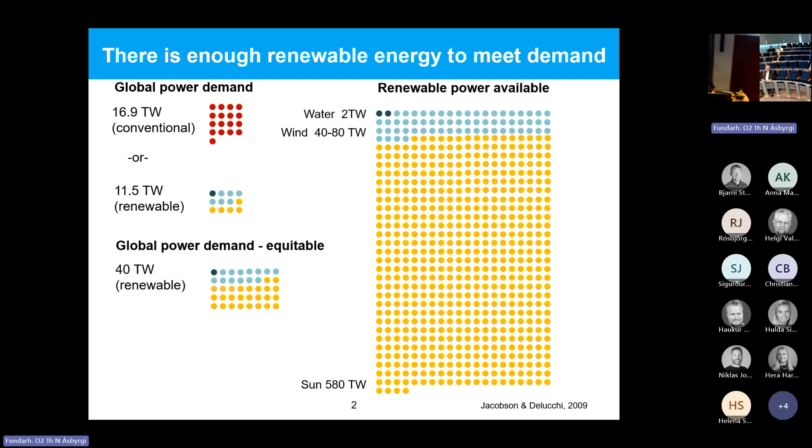Just enough energy to keep the traffic lights going and so that there's power at the hospital when you need surgery. If we look at it that way, we actually need about 40 terawatts. Okay, so much more than we even use today. And then we can compare that to what is available. So we have about 2 terawatts of water, another 40 to 80 of wind, 580 of sun. And you'll notice, I want to apologize on behalf of Jacobson and Delucchi for leaving out geothermal. I'm not sure why they did that.

But this is based on technology. So this is actually accessible energy, not just the energy that hits the Earth, but this is accessible energy using technology from 2009. So clearly the challenge isn't one of supply.

Really what it is, it's related to the intermittency and variability of most renewable energy sources. This intermittency creates this storage and transportation problem, right? As I think somebody mentioned, there's this mismatch between when and where energy is needed and when and where it's available. In Canada, most of our energy demand is in the winter for heating, and most of the renewable power we get is in the summer.

And so we have to start thinking about, okay, how do we capture and store that energy from the summer long enough to get us through the winter? And then in other regions, and Iceland may be one of them, there's a lot of energy here, but the only way we've been moving renewables around is through electrons, right? But building grids and connecting grids to where that energy needs to go isn't always feasible. So what we need is an energy carrier, something that liberates us from moving energy through the grid.

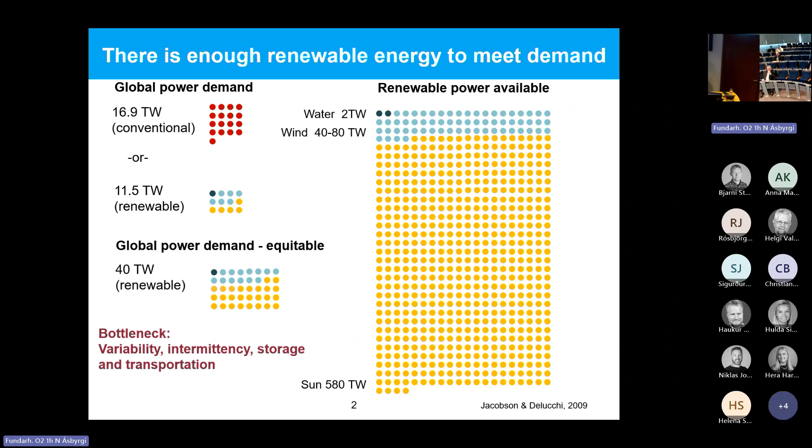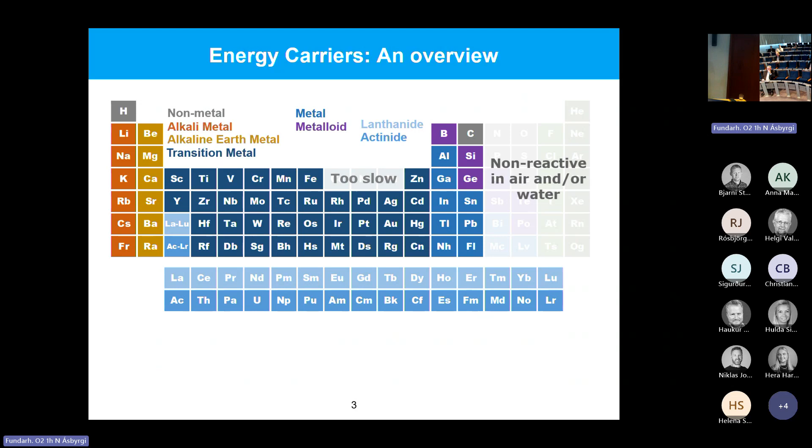So these energy vectors, again, if you've seen my TED talk, this is a little bit of a repeat, but I like to always just situate the audience. So this is every known element in the universe, and on Earth we typically get energy out of a substance through an oxidation reaction. So we need an element that reacts well with air or with water, and we have this transportation challenge, right? To make up for that geographical mismatch, we want things with high density. So anything with too high of a molecular weight will not be a suitable energy carrier.

On the first slide, you started to get a sense of the scale. And so we need something that is abundant. We want to avoid these rare elements because not only would there not be enough, but they'd also be extremely expensive. Safety. So nothing that's toxic or becomes toxic once it's oxidized.

And who here likes food? Okay. Well, I always take potassium off at this point because it's so important for agriculture. And so this is what's left. And it's not a surprise we see carbon up there. It's what forms the basis of our energy system now, and for good reason.

What fossil fuels give us is something that is high energy density and high specific energy. And we can use combustion reactions to get that energy out. So that means we also have high power densities. And that gives us convenient things like airplanes. But greenhouse gas emissions and reduced air quality are some of the major drawbacks.

And even if we weren't facing a climate challenge, fossil fuels are still a finite resource, and we can't just keep digging things out of the ground and burning them in this one direction. We need to start thinking about how to make our energy system reliant on something that's circular. So carbon is not it.

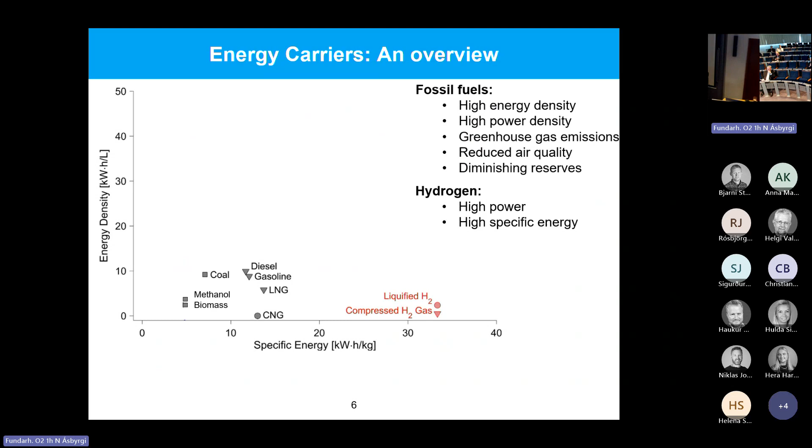But then it also has this extremely low energy density, which makes it very challenging to store and to transport. It's also a very small molecule, which also makes it hard to store and transport. Wide flammability range, 4 to 74%. So storing any great quantity of hydrogen is not something I want done near me. Anyway, so hydrogen itself may not be a great energy carrier.

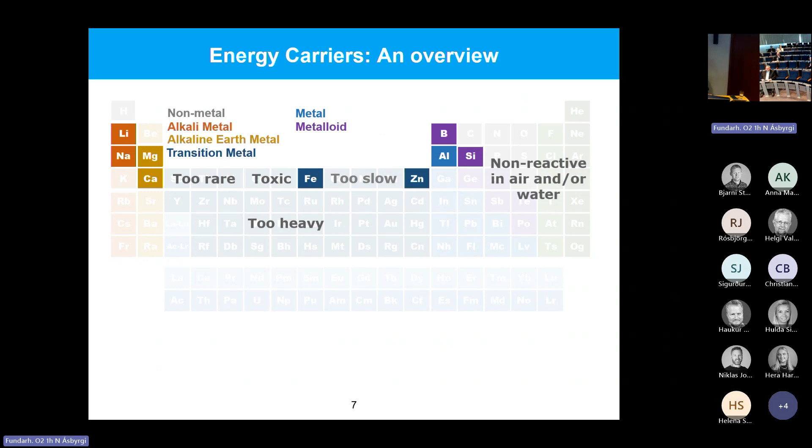And they have low energy densities because they have to carry the fuel and the oxidizer and a whole package to go with that. Definitely part of the energy solution, and batteries are very convenient for carrying a bit of energy with you, your phone, laptop, even cars. But when we're talking about long duration energy storage and moving storage around, batteries just can't quite do it.

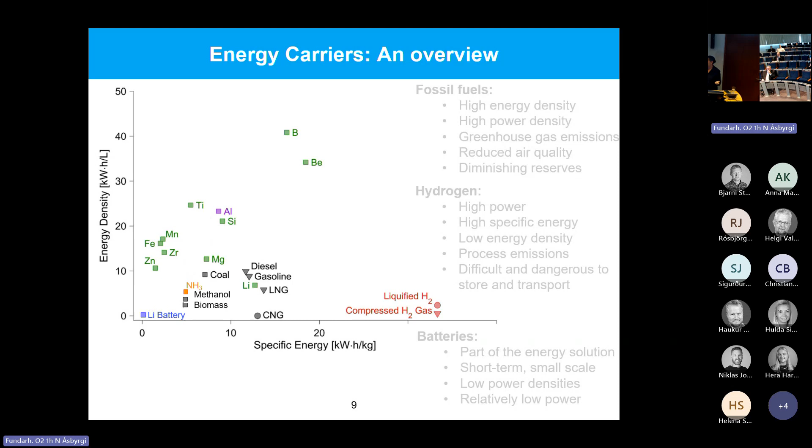Wait, do we say aluminum or aluminium? Aluminium. Aluminium, okay. I'll try and say aluminium. But it's written aluminum everywhere in this figure, or in this talk.

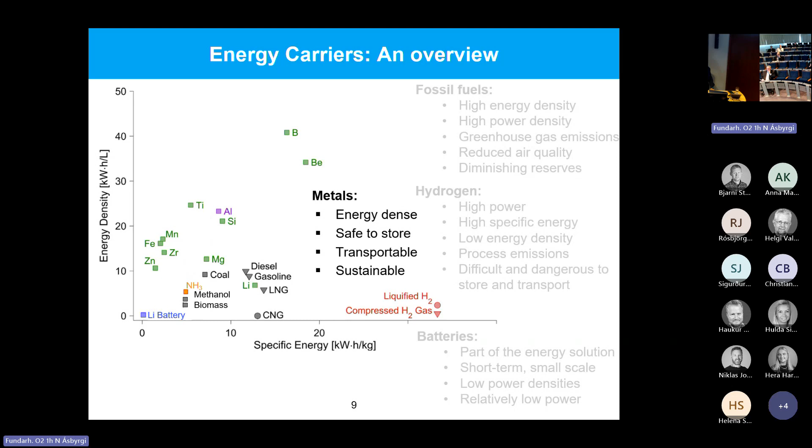So metals meet all of the criteria that we would want in an energy carrier. Energy density to store, very mature infrastructure. When it comes to common metals, we really know what we're doing. And metal fuels can be circular. So this is sort of how I like to envision a metal fuel system. So wherever it is that there's an abundance of clean energy, that's where the smelters are placed.

In Quebec, where I did my graduate work, there's an abundance of hydroelectricity. So much that Quebec has somehow become the 4th largest producer of aluminum in the world, despite having 0 bauxite reserves. And it's all due to that cheap power. So we're already kind of doing this. Once that metal is made, it's effectively storing that clean energy and can do so for a long period of time without leaking that energy or degrading that energy.

And then when the energy is needed, after either being shipped somewhere or months have passed and now the sun's not shining as much anymore and we need more energy, that's when the metal gets oxidized, fed to some kind of a prime mover. And then this is the key for the circle: to collect the oxides and then bring them back to wherever there's that abundance of clean power to recycle them.

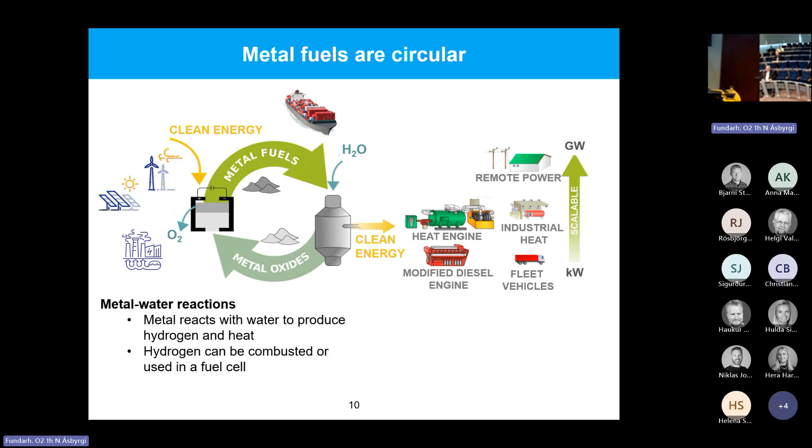In my research, I use water as the oxidizer rather than air. There's some really wonderful research going on in the direct combustion of metals. But in my research, I do these metal water reactions to produce heat and hydrogen.

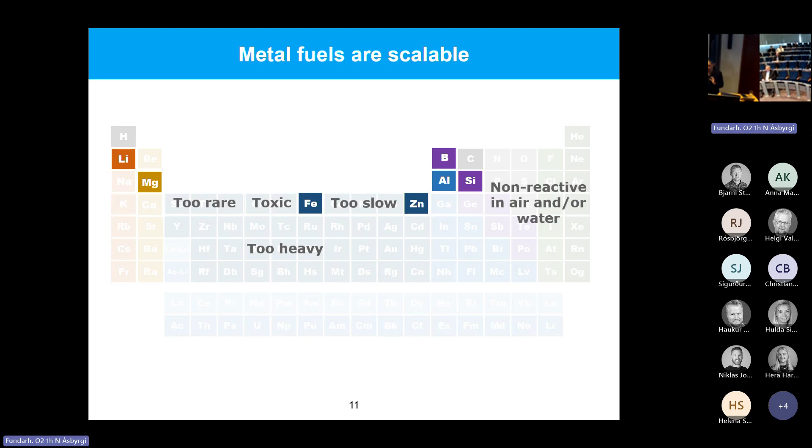Now, this last bit, I just wanted to touch on it very quickly, is the scalability of metal fuels so that we can narrow down the options a little bit more. If we do this very simple exercise where we say for some reason we needed to store 1 year's worth of energy in just one of these metals, this is how much of each metal we would need. And this is just a reflection of their specific energy. And then we can compare that to the known reserves of each of these metals.

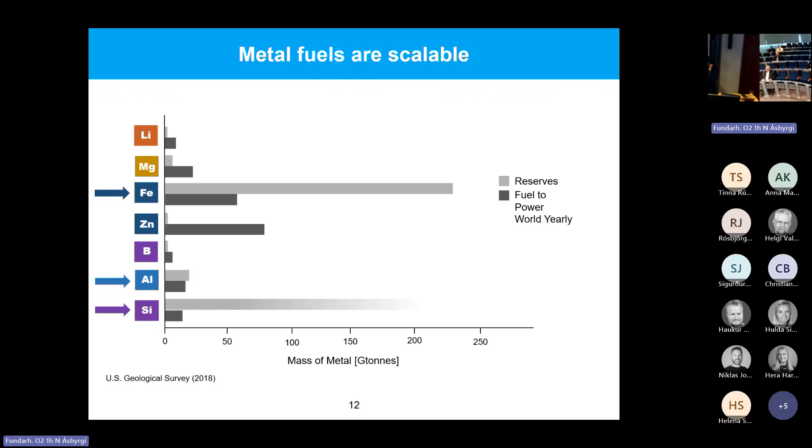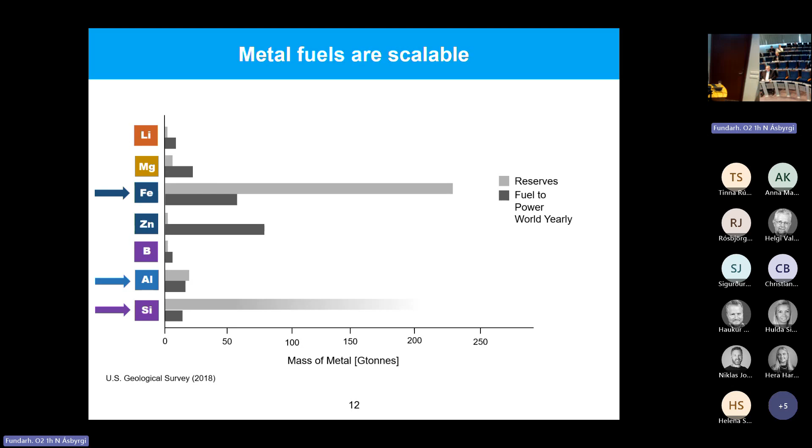And with this very simple exercise, we can see that there's 3 metals here that are really contenders for large scale energy storage, and that's iron, aluminum, and silicon. For metal water reactions of these 3 metals, aluminum is really the best one. It produces a lot of hydrogen, about 1,200 milliliters per gram of aluminum. It's abundant, it's light, it's energy dense, and the technology for producing aluminum is very mature.

The one thing that still does need to be addressed when it comes to aluminum is the use of the carbon anodes in the smelters. They degrade as part of the smelting process and produce CO2, and this is a process emission. However, there's a lot of really exciting research in the use of inert anodes. These don't degrade, they last a lot longer. And so with the advent of these inert anodes, this entire cycle using aluminum can be extremely low carbon or even 0 carbon.

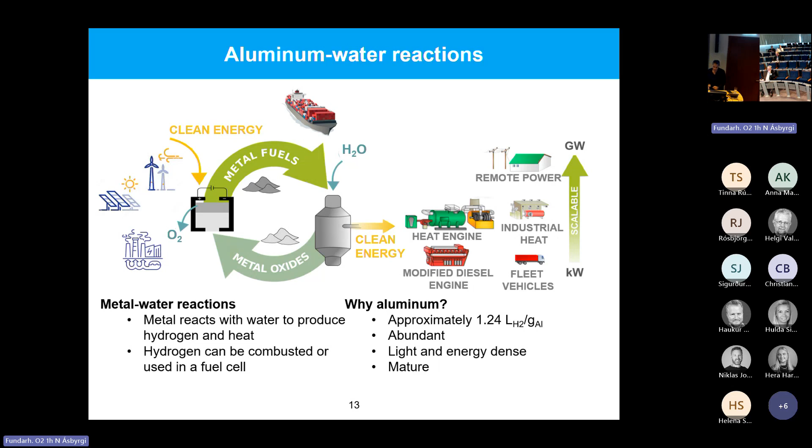And in the interest of transparency, I do want to address that there's different ways an aluminum water system could be deployed. The reaction produces heat and hydrogen. So the first scenario is one where both the heat and hydrogen are used and the water doesn't need to be taken into account, meaning the water is readily available. So it's either a stationary application near a big body of water or a marine application using both the heat and hydrogen, and this is where that system would lie in terms of its energy density and specific energy.

In another scenario where the heat is ejected, but just the hydrogen is used and again, water is available, the energy density falls where this 2 is here. The third scenario is one where water needs to be carried on board, but the heat and hydrogen are used. So think about maybe a train, some sort of long distance terrestrial transportation.

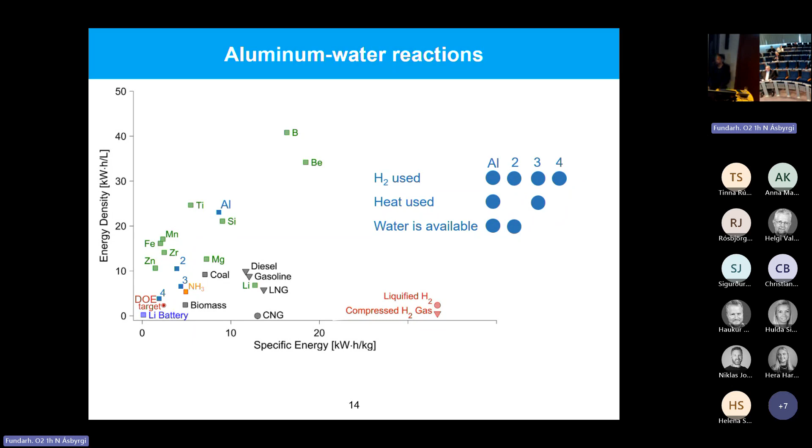So like a train or trucking. So it would fall where that 3 is, around ammonia. And then what I would consider the worst case scenario, where just the hydrogen is used, the heat is ejected, and there's no water available, then the energy density falls to where that 4 is. And I also mapped the US Department of Energy's target for hydrogen storage. And you can see that even with the worst case scenario, we're almost getting to that energy storage.

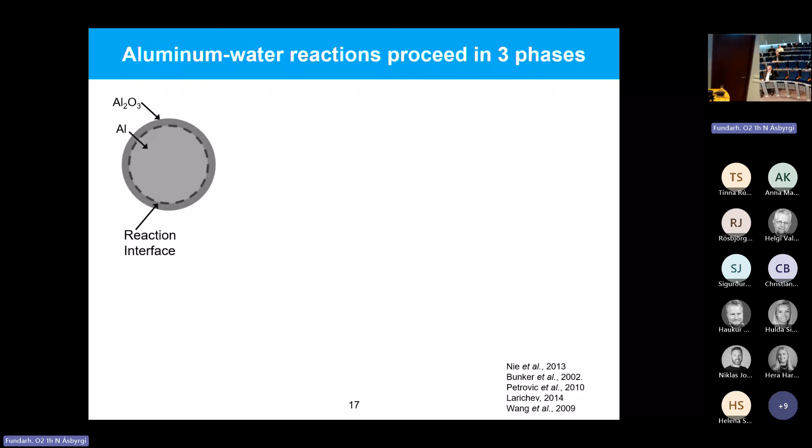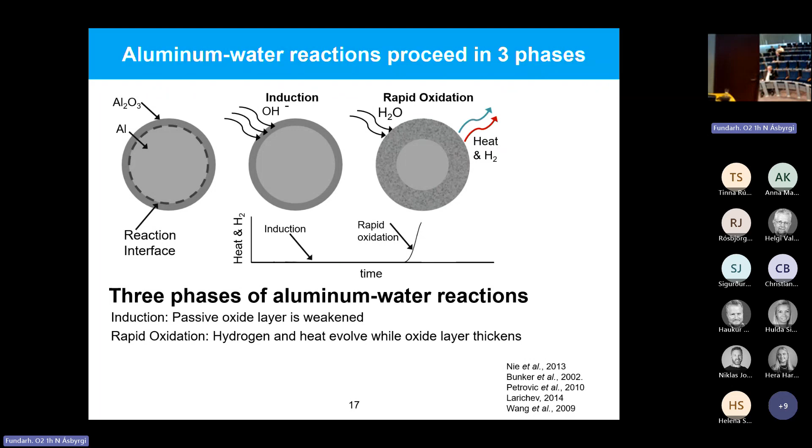And as a result, the reaction proceeds in 3 phases. The first one is what we call the induction phase. In this phase, that oxide layer is weakened through the migration of OH ions. Eventually, it weakens enough that water can get through. And then we have what we call rapid oxidation. So this is where the heat and hydrogen are actually released. And at the same time, of course, it's oxidizing. So there's an oxide forming, and it becomes thicker and thicker and denser. Eventually, the reaction will quench.

So it quenches for one of 2 reasons. One is all of the metal has been consumed, so the reaction stops, or the oxide layer or the newly formed hydroxide layer is too thick or dense for water to migrate to the metal, and so what's left is this core of unreacted fuel.

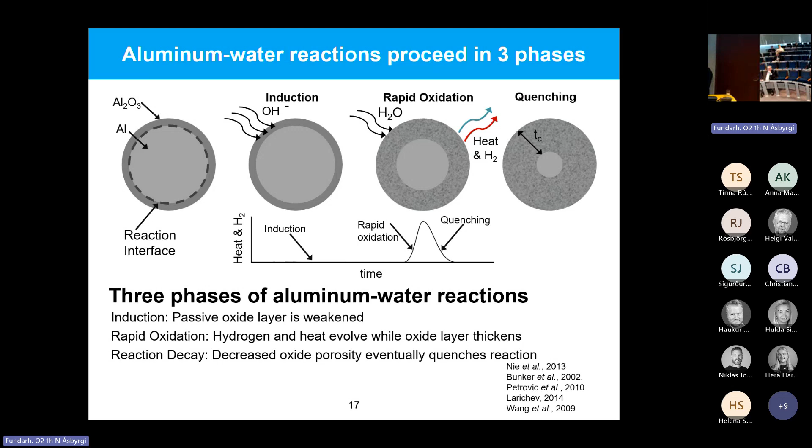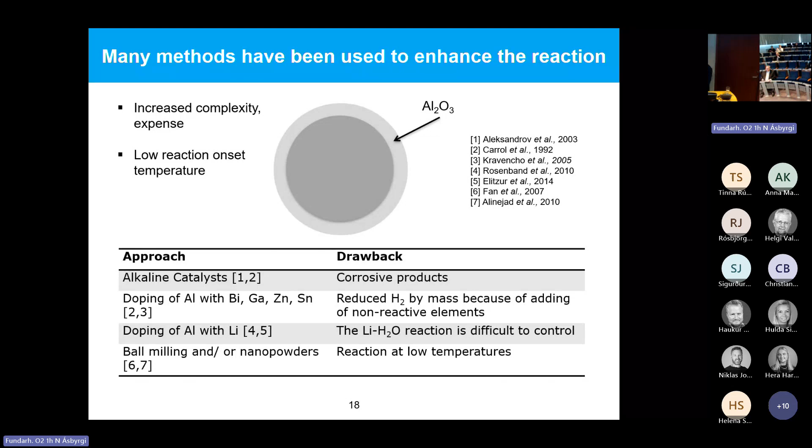Now, in these studies, that low reaction temperature is a feature. In my opinion, it's a bug, because it means that the reaction will happen at low temperatures. Not only is that a safety concern, but also half of the energy in an aluminum water reaction evolves as heat. So with a low temperature reaction, the heat that evolves is low quality heat, which is hard to use. And so half of the energy of the fuel is going to be wasted with the low temperature reaction. So obviously in my research, I go the complete opposite way.

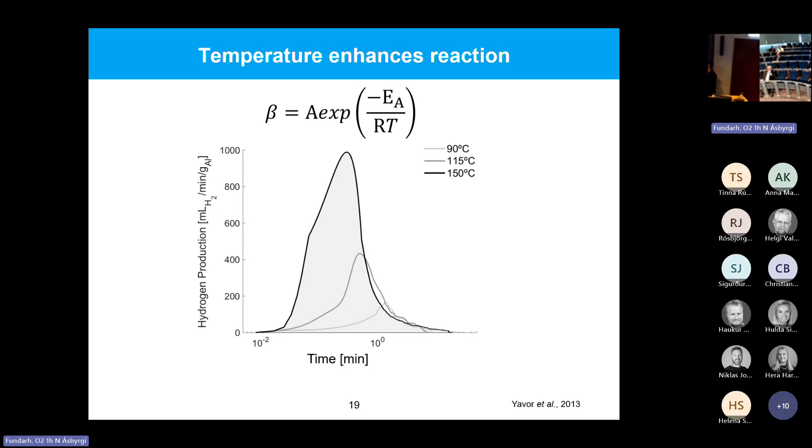These are experiments that were done by a predecessor of mine at McGill. Just looking at the Arrhenius expression at the top, we know that reaction rate increases exponentially with temperature. And this holds true for aluminum water reactions. You can see that with a pretty modest increase in temperature, there's more than a doubling in peak reaction rate. If you integrate these curves, that tells you the hydrogen yield. And so going up in temperature increases not only the reaction rate, but also the efficiency, or the hydrogen yield, in each case.

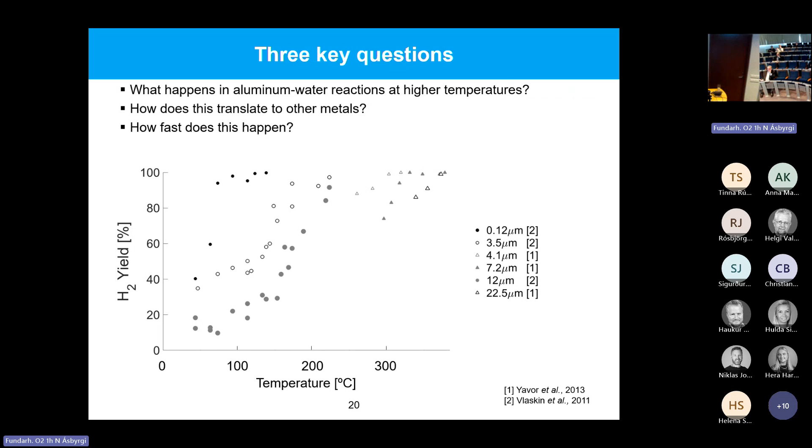So when I started my research, I really had 3 big questions. What happens if we go to even higher temperatures? How does this translate to other metals? And then how fast is all of this happening?

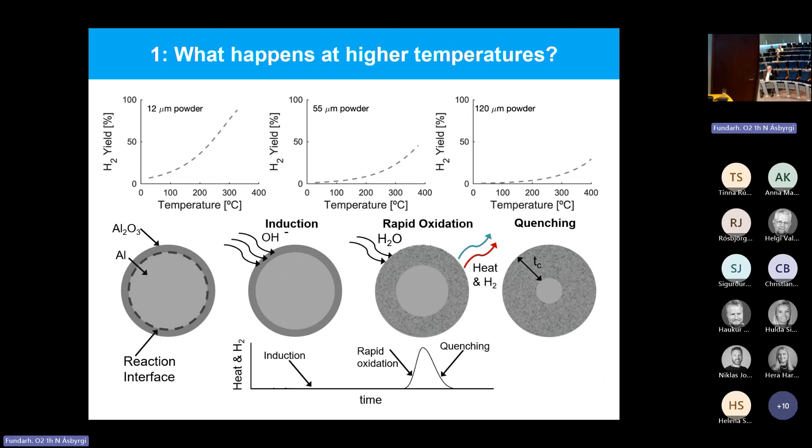So what happens at higher temperatures? Now, there was a lot of data for low temperature reactions. So just using that data, I extrapolated these curves based on the size of the powder: 12, 55, and 120 micron powder. These dashed lines indicated or sort of predicted what we thought we would see. And so you could see that with 12 micron powder, you would get the full hydrogen yield, but by the time you get to 120, it would be less than half. And this was based on what was out there in the theory at the time.

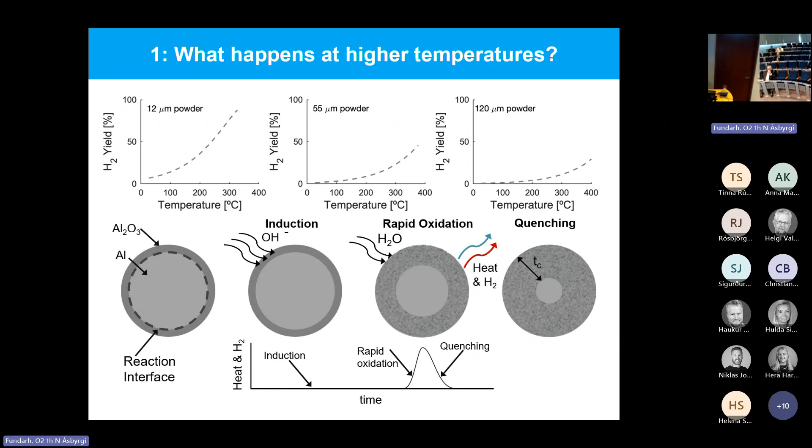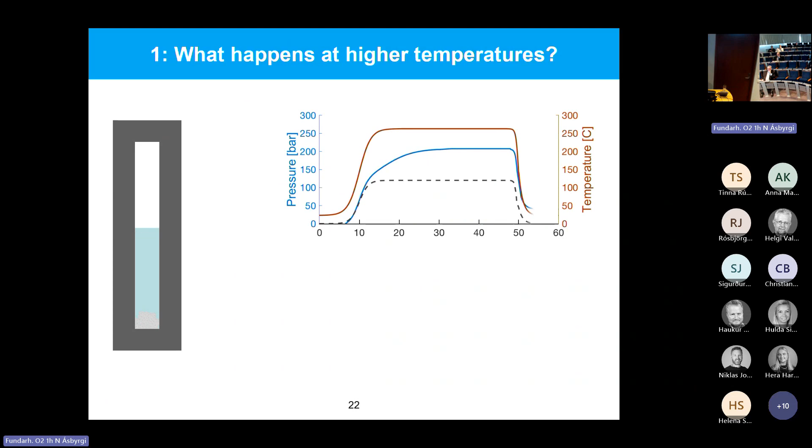So I did some experiments, very, very simple. Metal and water were loaded into a reactor, and it was sealed up. And then it would be heated to the temperature that we were interested in, held for a certain amount of time, and then cooled back down to room temperature. And the yield was calculated just comparing the initial and final pressure. So very simple, very straightforward. This is what the curves actually look like. And that's the actual apparatus there. It's not much to look at, I know, but what's happening inside is what we're interested in.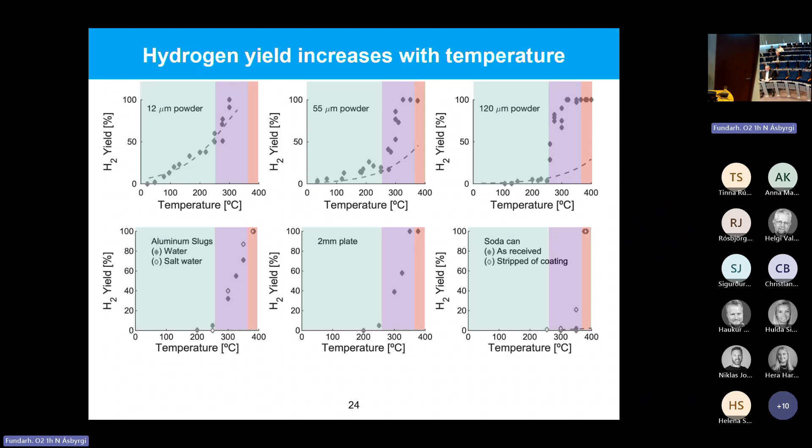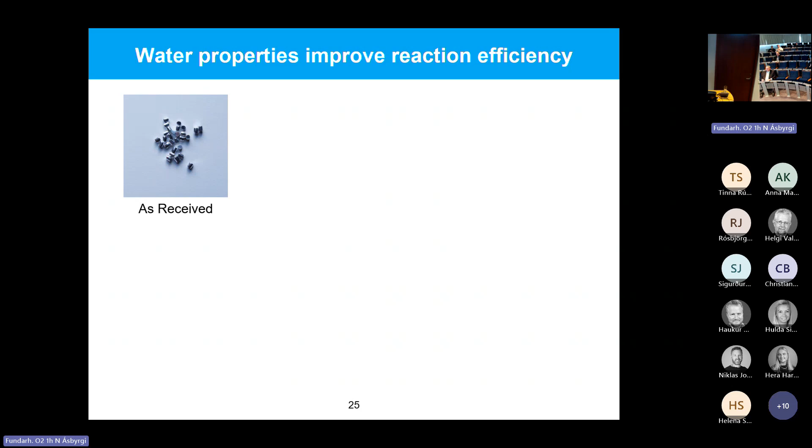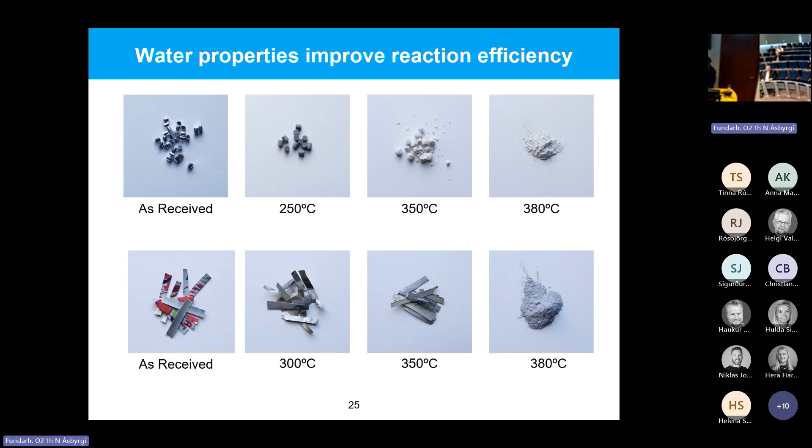The first one I'll talk about is what happens at around 250 degrees: the ionic product of water peaks. So water can act as both a base and an acid. And all that means is that it can either give up or accept a hydrogen. And the ionic product is just the product of the concentrations of H ions and OH ions in the fluid. And so as temperature increases, these forward reactions are favored, which means that the fluid becomes furnished with OH ions.

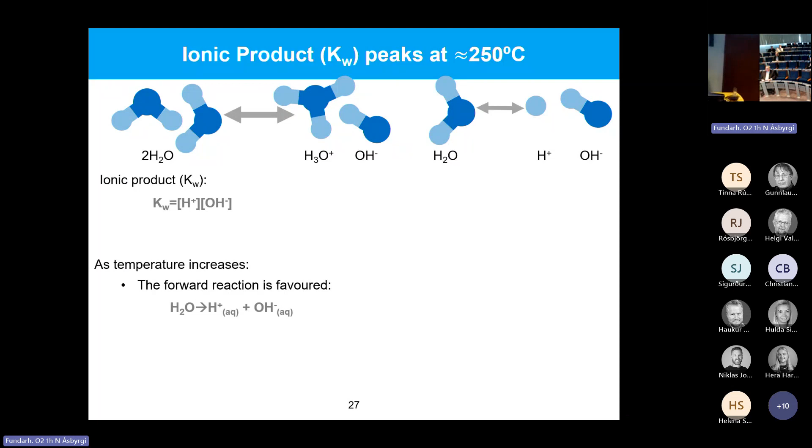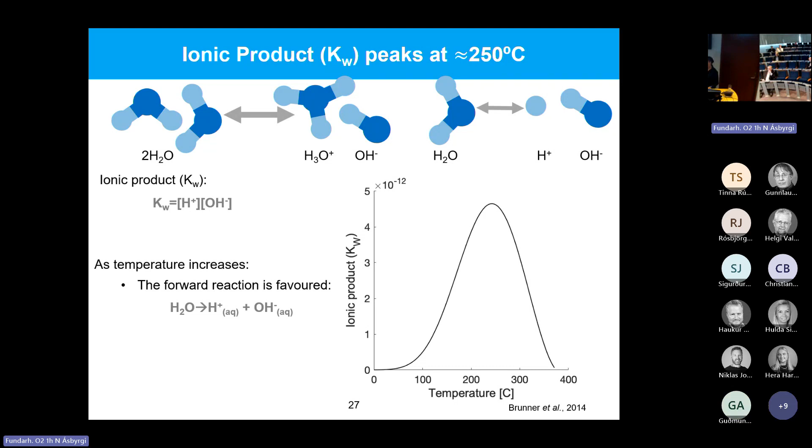What I didn't mention in these low temperature experiments where they were trying to catalyze the reaction, one of the most common ways of catalyzing the reaction is the addition of a base like sodium hydroxide or potassium hydroxide. So by adding that base, there's more OH ions, and that's what attacks the passivation layer. But by going up in temperature and pressure alone, we get that. I don't want to say catalytic effect because it's not a catalyst. It's really just the change in the water properties themselves. So you can see here that it peaks, and it's this change in water property that really enhances the reaction and why we get much higher yields in that transition zone.

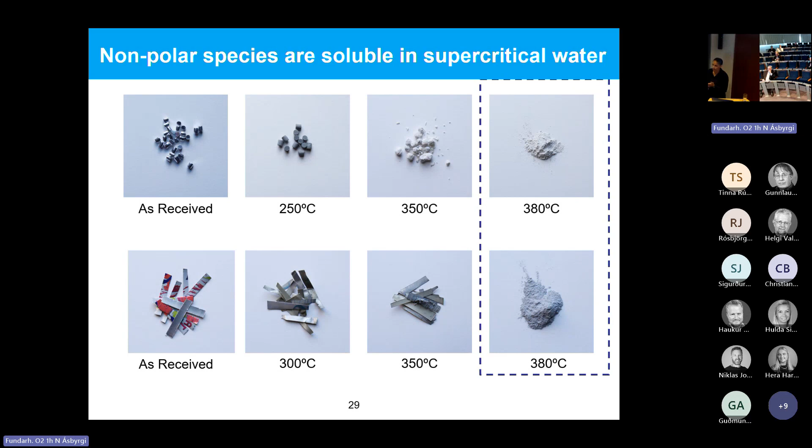And then this was also quite remarkable, going from something that really resembles metal to a powder. And this is due to the change in polarity of supercritical water. So relative permittivity is what governs solubility, and under normal conditions, water's quite polar and dissolves polar species like salt. But at the critical point, it drops to sort of 1 to 10, and that range is just a function of pressure. And so it becomes almost completely nonpolar, which means that it can start to dissolve nonpolar species. And the nonpolar species that we're really interested in dissolving here would be the hydroxide that forms in the reaction.

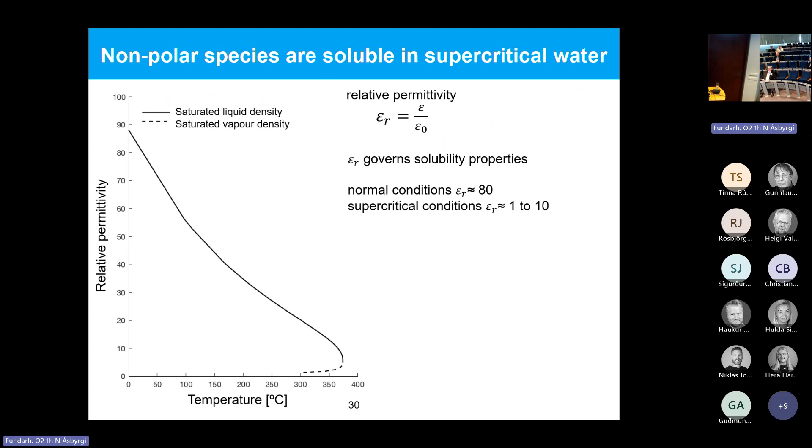And so my hypothesis is that the formed hydroxides are either dissolving or they're just not cohesive enough to passivate the metal. So the metal is continuously exposed to the oxidizer until it's completely consumed. And the form of the oxides kind of supports this hypothesis. So that's the first question. Going up in temperature helps the reaction. Great. How does this translate to other metals?

For these experiments, I did take out most of the group 1 and group 2 metals because we know how reactive they are with water, which is very. And so just in the interest of safety, we didn't do experiments with them. I also removed boron and iron because, I can go into detail of why, but they're not expected to be very reactive with water. And then I brought back titanium and zirconium because there were some low temperature experiments that were done that showed that these were promising in terms of their reactivity with water.

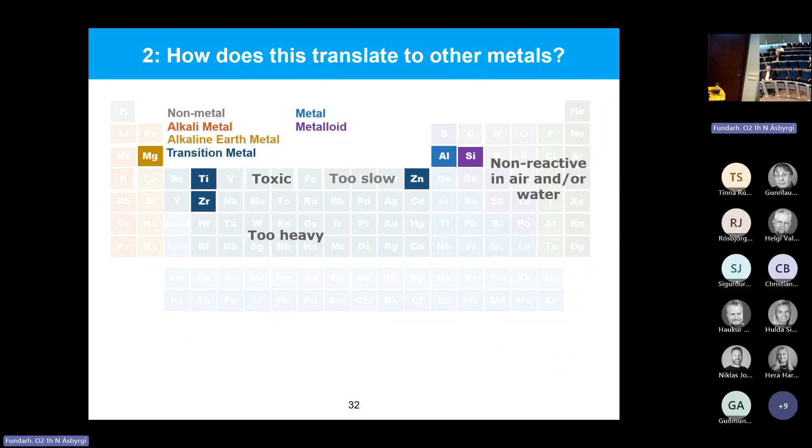And this is what I found. So this is what was expected in every case, just based on a simple calculation. And this is what was found. So you can see that with the aluminum, its alloys, magnesium, and zinc, under supercritical conditions, we get full yield, or in almost all the cases, but very, very good even with the aluminum 6061. Whereas the silicon and zirconium, I would say underperformed, but what this is just telling us is that these are potentially great materials for designing or for using in the system.

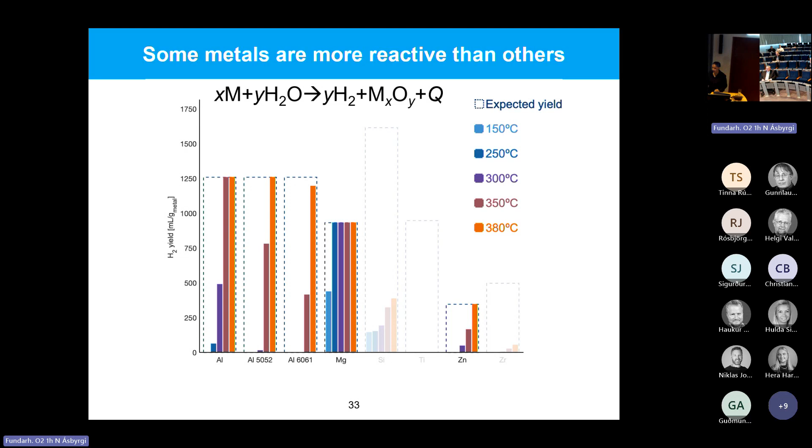And titanium as well, there was zero hydrogen produced. There were changes to the metal, like you could see them. You could see them also under SEM, but there was no hydrogen produced. And then finally, how fast does this reaction occur? So what I was really interested in is this region of the vapor dome. That star is the critical point, and so this is the isotherm that I was following. And so I was interested in the role of the water density.

And so for these experiments, I built a new apparatus. It had a top and a bottom reactor separated by a valve. And in the experiments, everything was loaded and then heated up to the temperature. When we were at the temperature, the valve was opened. They mixed, produced hydrogen, and then everything would be cooled back down. So like I said, I used 3 densities of water, what I'll call the high density supercritical water, the low density supercritical water, and then the vapor density water.

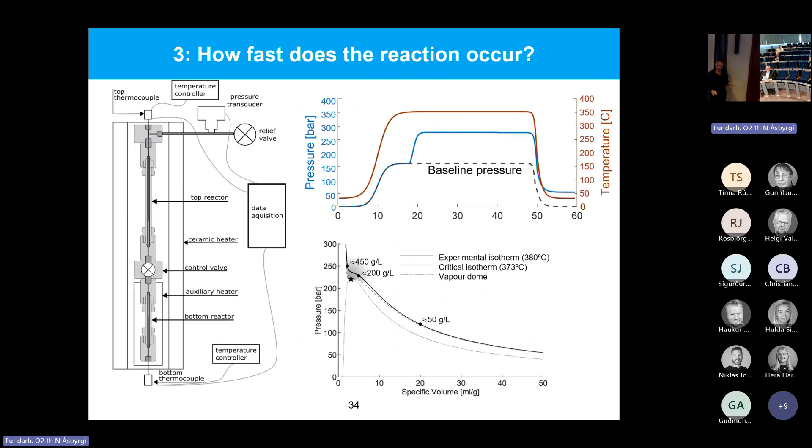And then with the rates, it was a different story. So here, there's a big difference between the high density and low density supercritical water, but not much of a difference between the low density and the vapor density water. And this held for all of the samples. So those are the results for the 10 micron powder, but you can see all of them. So there's a big difference between this and this, but not so much between this and this. This was a little bit counterintuitive.

It wasn't what I was expecting to see, because the low density supercritical water has the properties that seem to be desirable for oxidation, right? Low viscosity, high diffusion rate, high relative permittivity. These are all the things that indicate it would be a good oxidizer. But we saw the opposite. And so what that tells us is that there's some relationship between the reaction rate and density or pressure. And so, if we're writing an Arrhenius expression for this reaction, we would need to somehow capture the concentration of OH ions, is my current thinking.

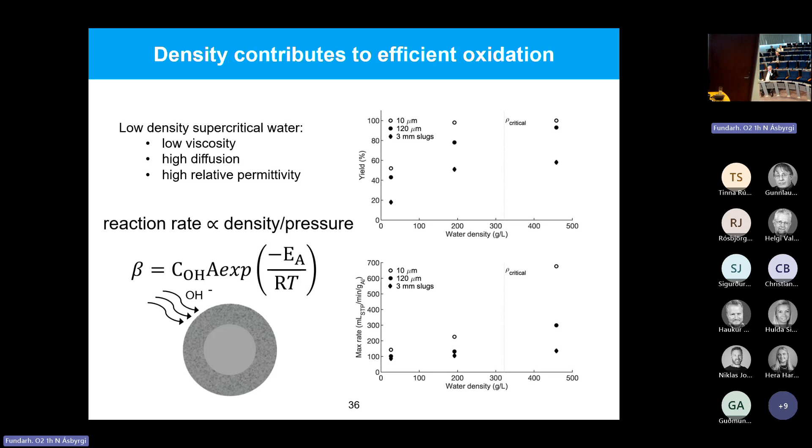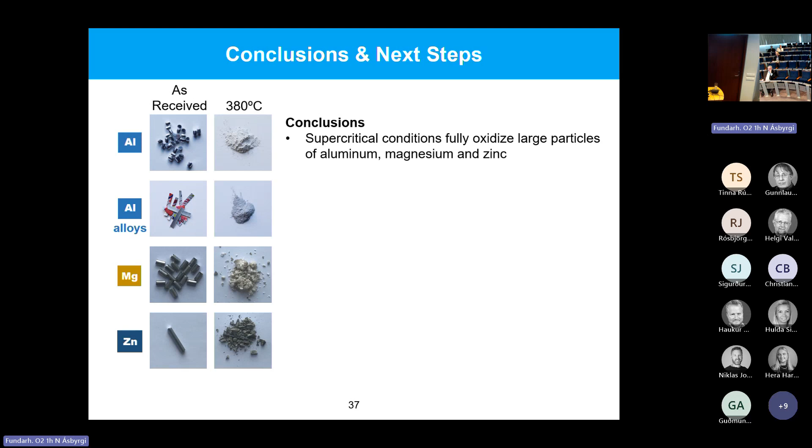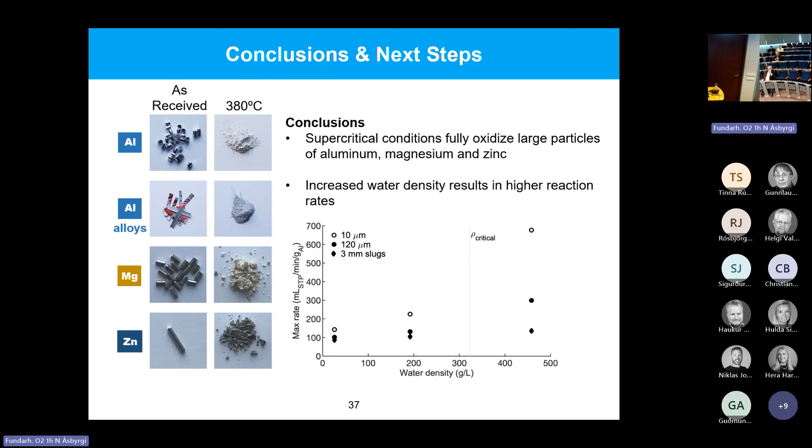So, we've identified 3 metals that are promising as metal fuels. And we've also determined that increased water density or pressure is conducive to higher reaction rates. And so what comes next is what I want to share with you. One of the things I'm really interested in is the effect of water quality. All of the experiments I've shown today were done with very, very pure water. We use reverse osmosis water, but in the real world, that's not what we'll use. So I'm interested in, if there's salt for marine applications, or if there's organic material in the water, how does that affect the quality of the hydrogen that's produced? And does it poison the reaction, enhance the reaction? These are all open questions.

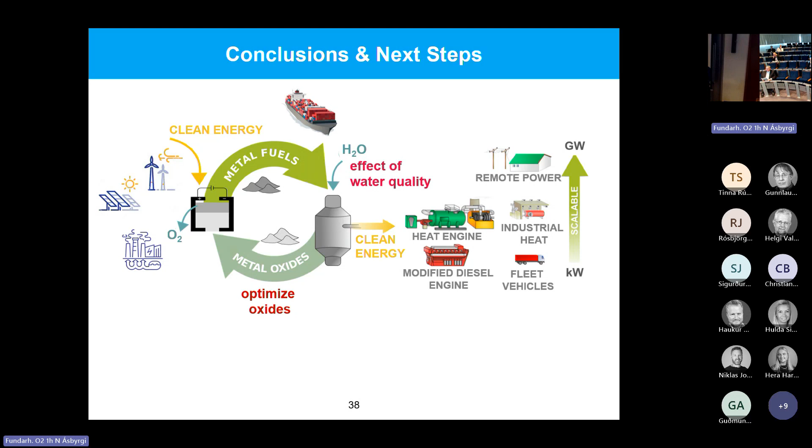I'm also really interested in how we can optimize the oxides for recycling. We know that based on the conditions inside the reactor, we can tune certain things about the solid product that is produced. So we can make the particles larger, smaller, we can do some things with the grain sizes. So that's something that's really interesting that I'd like to start to work on. And then finally, okay, great, we can produce heat and hydrogen. Now, how do we start to use it? And so that's another area of research that I'm looking to branch into.

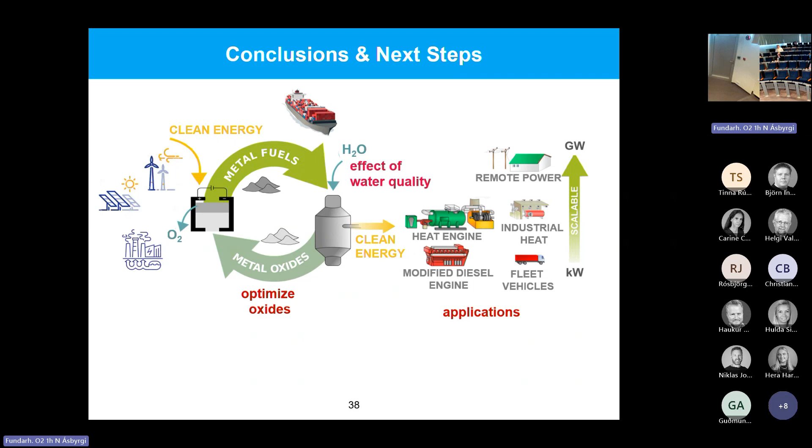Thank you. So while she gets the talk up, I will just start by saying that there are two projects in this field that Kina gave us a presentation on where Icelanders are participating. I will briefly, in my 10 minutes, introduce one of the projects, and then Ruan will introduce the other one. But first I would just say, as somebody who has been working a little bit in this area, in my opinion this is as expert a presentation in this area as we could have gotten.

Having worked now on our project for 3 years, I came to the same conclusion. You will see that the project I will be talking about is working on the lower temperature end, but I also came to the conclusion that if we want to use this for energy storage, we have to do all the things that Kina's been talking about. Go to a high temperature, especially if you want to harvest the maximum heat, etc. So that's my brief introduction on that.

And then I just want to introduce myself, because it's my first time here at Verkís. I've been in Iceland since 2016, in part so that we could have a complete BS degree in chemical engineering. Before that, we in Iceland didn't have a complete BS program, which is why that was important in 2016. And the main thing that I keep myself busy with since 2019 is exploring the possibility we have in Iceland to produce e-fuels: hydrogen, methanol, where we are a world leader in some way, ammonia, methane.

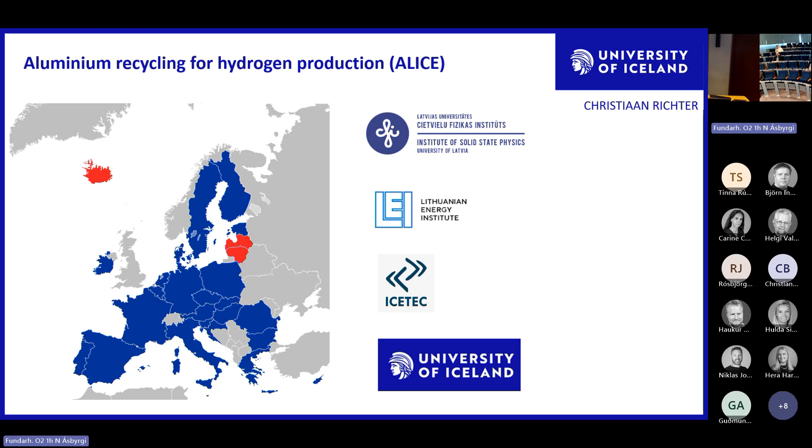And so the project, the name is there. I didn't come up with it, so I'm glad for everyone to answer the question about how to pronounce it. But of course, here's the partners in our project. It's a Lithuanian, Latvian, Icelandic collaboration. There are the Baltic institutions, and then you'll see Tæknisetur or ICETEC, which used to be the Innovation Center, is involved in both projects. And in this particular project, we at the University of Iceland are also a partner. And this has been very well presented in Kina's presentation.

But the basic idea is that you can have aluminum reacting with water quite vigorously if you get past the passivation layer. And you can do that with some of these tricks that she presented on, or by just going up in temperature. And I think if you're going to do a big commercial installation, maybe going up in temperature is the simplest. The most common approach, if you look at the literature, is also the one that's being used in the project that we have partnered with.

So this is the project with the Lithuanians and Latvians. We are doing the most common approach, which she has briefly mentioned, where you throw in a strong base, sodium hydroxide or potassium hydroxide, to get the reaction going. And then the temperature can be as low as 20 Celsius. It typically heats itself up to 80 Celsius if you don't cool it.

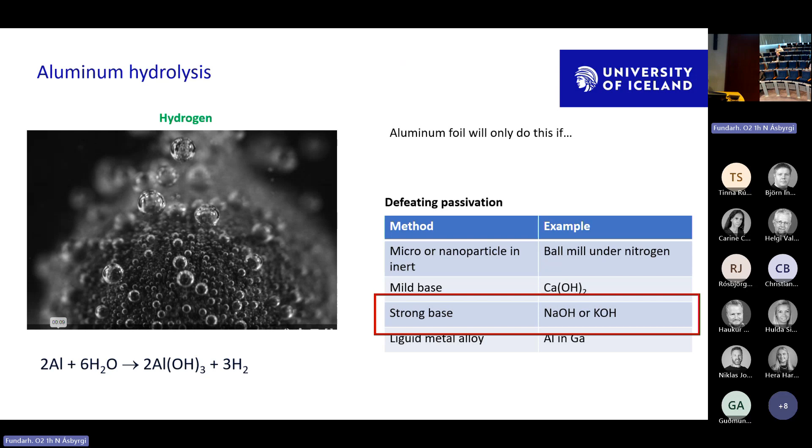Okay, and then in our particular project, the one we're doing with the Lithuanians and Latvians, we are basically just focusing on waste aluminum, so scrap. And it turns out, if you research it a little bit, we are doing pretty well with cans. So as long as people deposit the can, you can remelt the can, and it's probably the best thing you should do with it. So this is probably not the best material to react, because it's just better to remelt it.

And then we have been looking into dross a little bit. We even got samples from Alcoa and Fjarðaál to look into it. But the main opportunity that we have seen so far is in some of the scrap metal.

If you really look deeply, I'll give you the short answer. If you can remelt it, it's the best thing, just to remelt it. But sometimes there is not a match for the alloy.

And then rather than, oops, should I just hang up? Or you can hang up from there.

Yes, so this is primarily the background of this project. Take scrap metals that you cannot just remelt, and then see if you can extract value out of it by harvesting some hydrogen and producing aluminum hydroxide first, which you can calcine, and then you have basically alumina that you can return to the smelters. So it's basically a recycling option. Okay.

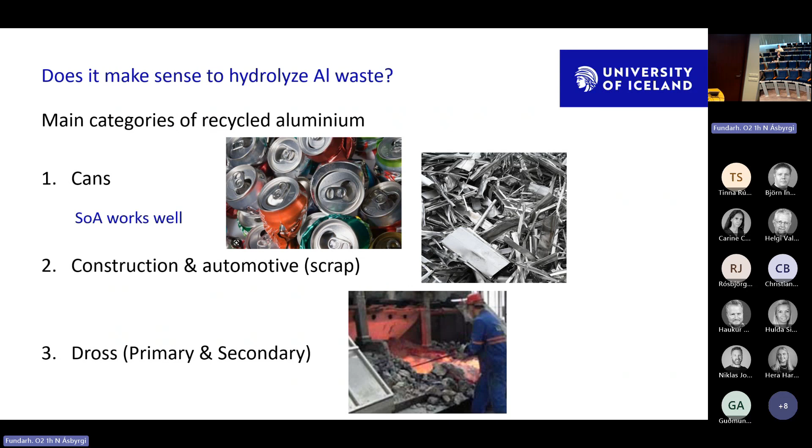So yeah, these things are basically saying where the opportunities are in recycling. So it's basically what Kina talked about, but now the focus is on optimal recycling, getting maximum value out from a waste that you cannot remelt.

So in our project, there's many aspects. Our Lithuanian, Latvian counterparts have got a lot of equipment, and they also play with plasmas and nuclear physics, the sort of old Soviet remnants. So they're not afraid to do experiments in all kinds of conditions. So both of these institutes independently are making reactor prototypes. So this is their role. So if you want to see a prototype reactor, you can go visit them.

Then they also helped a little bit with modeling the reactions. And then we published 2 papers, and I'm going to talk about this one. That's why I've circled it, just because it appeared today. So it's like a fresh result.

I don't know, you Icelanders, we of course love fresh baking goods and bread and whatever. It comes fresh from the oven.

So the only reason I'm really going to pick this one result to share among the many is just because it's fresh. It came out today. The relevant article, you could see it today for the first time. Okay. And then finally, ICETEC is very much involved in characterizing, for example, the dross from the smelters, seeing what's in there, and then also the solid products.

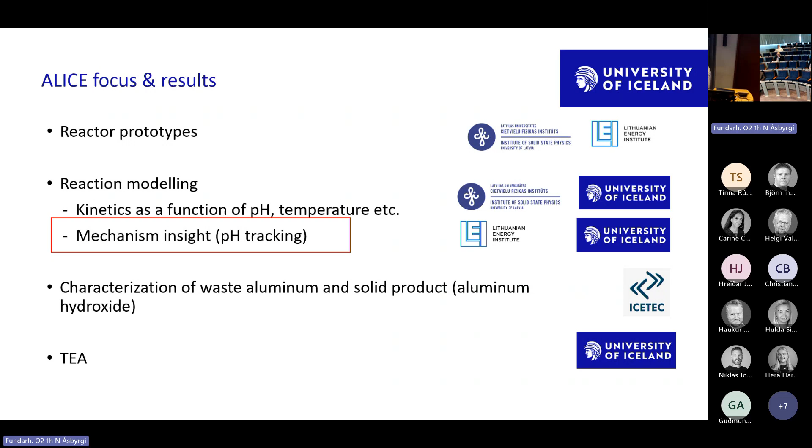And then our final job in the project is to do techno-economic analysis. Okay, and now I'm going to jump to this fresh result and I'll give you the main overview. And I know it's a bit messy slides because it's the first time I've been sharing it with anybody, the article just came out. But essentially what is on the board here is just the main idea of the project.

But to understand the little result I will share now, here is the simplest understanding of the chemistry, certainly at the lower temperature, because the product slightly changes when you go up in temperature, as you heard earlier. But what is the chemistry that's happening? So the first chemistry that is happening is that the aluminum can dissolve. And again, this might change in high temperatures.

But if you have a very basic solution like what we do, pH 14 or 13, then the aluminum metal can completely dissolve. In fact, our Swiss colleagues have done beautiful experiments where you throw in the powder, and if you don't have too much powder so it's saturated, it's all gone. The aluminum dissolves at low temperature with a high basic pH; this is the first step.

The aluminum dissolves. Then there's another step: when the aluminum atom leaves as an ion, it leaves behind electrons in the solid aluminum particle. And that then can evolve the hydrogen, basically split water. And I admit what I'm telling you is one idea of what happens. What I'm going to show you now is that in this result we've just published, we're checking how much the data corresponds to this model.

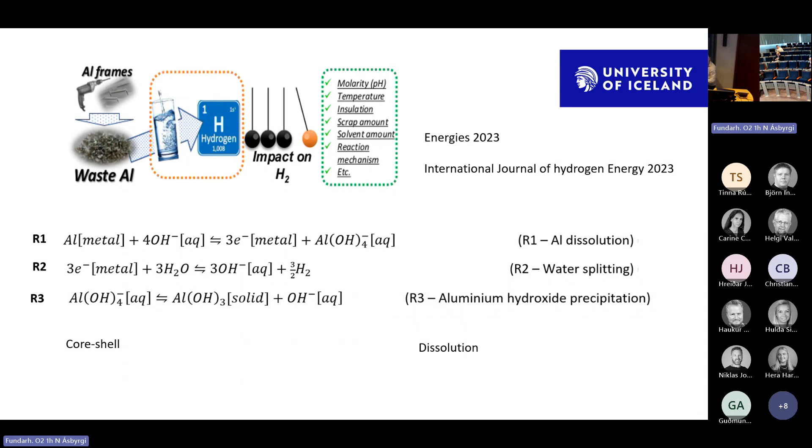And I think as the temperature goes up, the mechanism might slightly change, or the path of how the hydrogen comes out in the aluminum reaction. And then finally, these aluminum ions, if there's enough of them, deposit and make new aluminum hydroxide particles. So this is the most commonly cited, most commonly believed chemistry in the literature for the low temperature version: how do we get hydrogen, how do we turn aluminum metal into aluminum hydroxide? These are the 3 steps. And then the key thing I will just show over here.

So there you see something more similar to what might be happening at a high temperature, that we have a core shell reaction, where actually the aluminum doesn't dissolve, the reaction just eats up the particle towards the middle, and then the unreacted part in the middle may stay unreacted, and you don't have maximum yield. The nice thing is, you have to use a high base concentration at a low temperature, but we get almost always 100% yield. And it's not a surprise if we do it so that all the aluminum dissolves.

Okay, so now we'll get to the point so that you can understand just the result, and that's all I will do today. And that is, if you look at each of these steps, the first time I did it, I thought these are just cartoons to show the steps, but I don't want to spend too much time just describing the pictures for these steps. This is what I want to show.

So the very first step, if you carefully look at the reaction, you will see that it consumes 4 hydroxyl ions. So if the first step alone were to happen, and the other 2 steps did not yet happen, what you will see is your OH minus, your hydroxyl ions, will get less. And that corresponds, if you think back to high school, or if you work with electrochemistry a lot, if you reduce your OH minus ions, your pH goes down.

So this is the main thing that we have published now. We realized if we look at the pH in the reactor, we should be able to see if, for example, this happens first, and then this, or does it all happen simultaneously? For example, there should be a pH change as this step happens. And then if you look at the next step, you can see now where the game is.

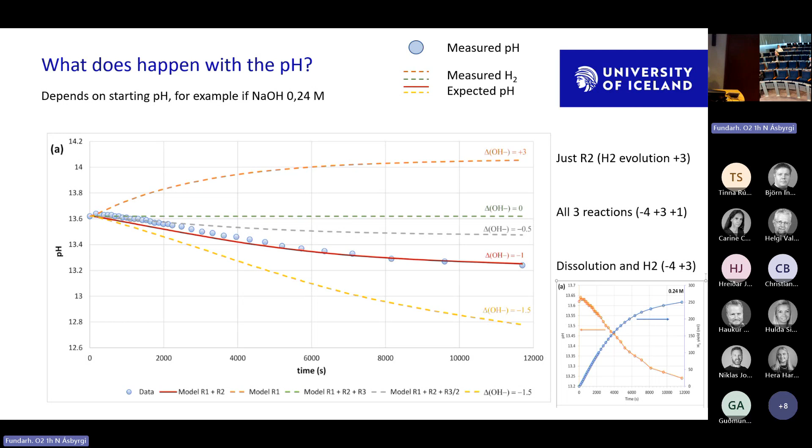That's what fits the data at this moderate basic pH. And then of course, if you let this go long enough, the aluminum hydroxide starts precipitating and the pH completely goes flat. So at these not terribly basic conditions, it seems to fit the basic model well.

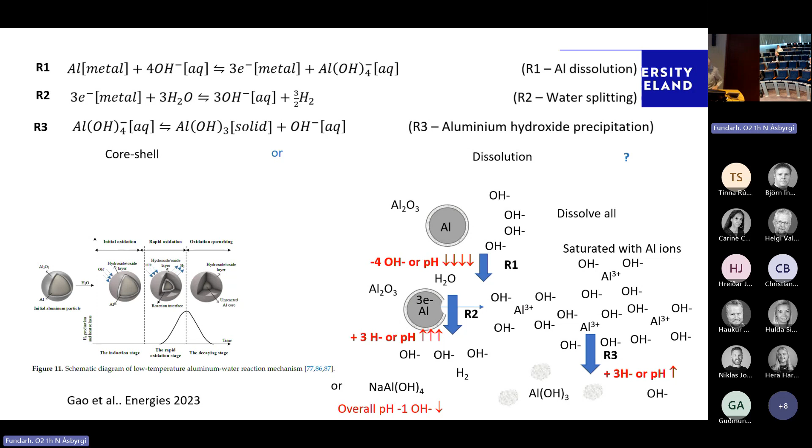So this is all I'm going to share. Just the basic take-home idea, which we can take right up here in Iceland, is this idea of measuring the pH to see what's going on. We and the Lithuanians and Latvians came up with it. Maybe some other people have done it. Have you done it? No. So of course, other people may have done it, but we couldn't find it in the literature. So I thought it's something to share, also because it's a fresh result, and it relates a little bit to how things are going.

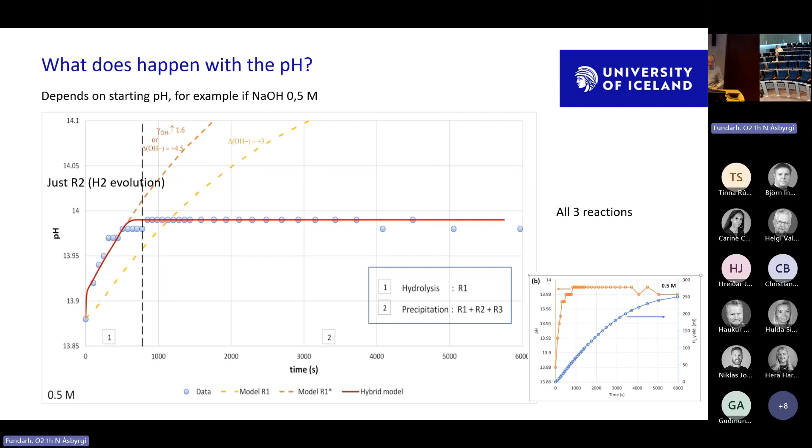That is it for me. Okay, yeah. So right there. This is sort of the conclusions, what I just shared. That's it.

Some question for Christian? You can ask some of the previous questions again. They were also good. And we also have a take on all of them.

I'll take the one about the intermittent aluminum smelters, because that's something we in the e-fuel community are also very involved in. When it comes to producing e-fuel, electrolysis is, in principle, very flexible. In the last 6 months, one of the e-fuel projects, Carbon Iceland, has been meeting with all 3 of the smelters, because we can really have an alliance. Firstly, the smelters have the CO2, because of these anodes that are burning, so that we can package our hydrogen into methanol. And secondly, we're actually partners when it comes to energy. Both the smelters and e-fuel will do better in Iceland if we are not so starved for energy.

In Iceland, we have not had a new dam for 10 years. And my home country, South Africa, did the same thing, and now there are rolling blackouts. So generally speaking, as the country grows, we need more energy. So that's one way we could do it. The e-fuel project and smelters can work next to each other, and the projects can be designed from the ground up. That's really why we're reaching out to EFLA and Verkís, and we would have many subcontracts if these things were to be realized, to be flexible, and then we would actually be a partner with the smelters and help them levelize out.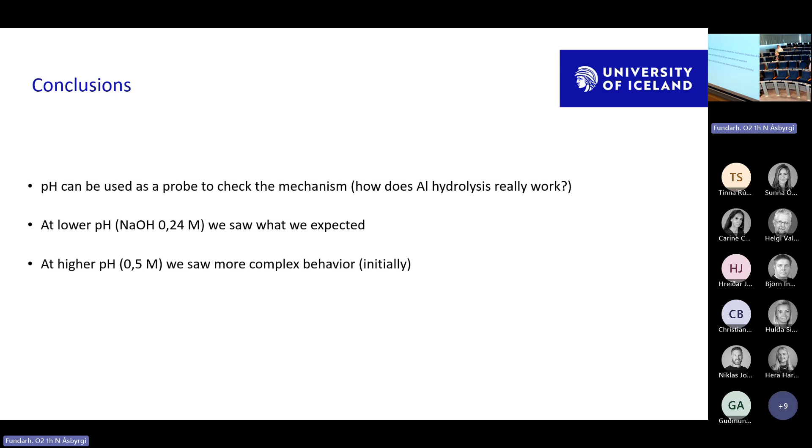Okay, the last on the floor is Alan Merbekova. Dr. Alan has over 12 years of experience in academia and industry working with metal production. Currently, she works as a senior research scientist at Tæknisetur or IceTec on various green technologies, where they develop CO2-free metal production. She will talk about the Reveal project, a new technical solution for storing large amounts of energy at low cost for producing heat and electricity using aluminum as a renewable fuel.

The floor is yours, please. Yeah, thank you. It's actually a great honor speaking here. Verkís has been my first workplace, and I had very good impressions, and my colleagues were very friendly and nice, which helped me to come to Iceland.

So I'm presenting this Reveal project. This project is co-funded by the European Union Horizon program and the Swiss State Secretariat for Education, Research and Innovation. The idea came from our Swiss partners, where energy demand was higher during wintertime, especially for heating. So this project develops a solution for storing large amounts of energy with very high storage energy density, more than 15 megawatt-hours per cubic meter, at low cost for producing heat and electricity. So we started this project last year.

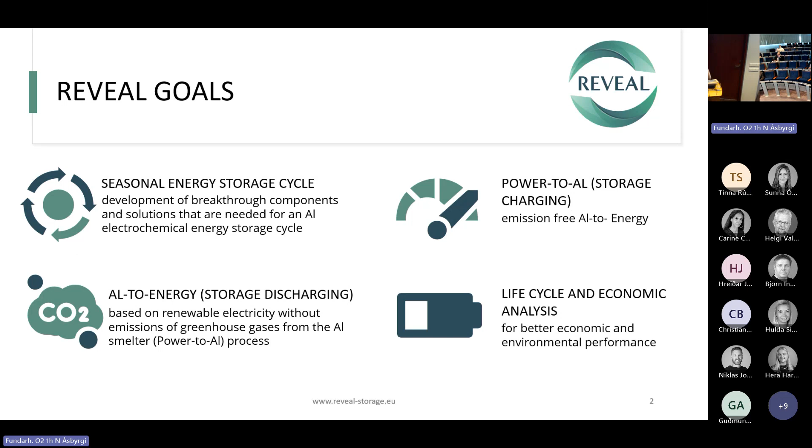The main goals are the seasonal energy storage cycle, power to aluminum, which is our storage charging, aluminum to energy, which is our storage discharging, and life cycle and economic analysis. So the concept is storing renewable energy over longer time at an attractive cost and an acceptable environmental impact. The situation is that we now have cheap renewable energy, and we also have solutions for short-term storage, but we don't have solutions for seasonal storage over longer time spans.

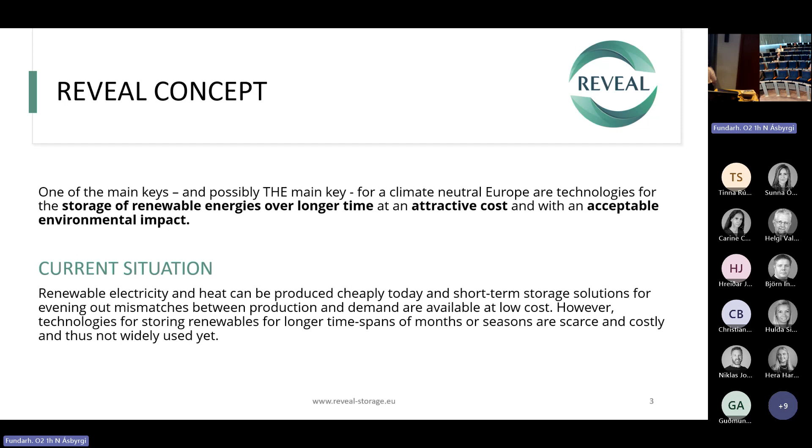So for that, we came up with a solution in which we convert aluminum oxide into aluminum electrochemically. And because electricity is involved in this process, our aluminum becomes a renewable fuel. It has a very high energy density, as it stores a lot of energy inside, about 23 megawatt-hours per cubic meter, which is 8 kilowatt-hours per kilo. And we can use it and produce energy. It's also easily transportable. As you can see, it's a solid product and it doesn't degrade for months or even decades.

And in Iceland, the main thing is that I think this project will drive the need for low-carbon aluminium. In Iceland, we are developing a technology for producing aluminium without CO2 emissions. This is a project with Arctus and IceTec. We have recently gained partners from Fremont who are supporting us, and we're doing the pilot scale. So I can circulate this around so you can take a look at it.

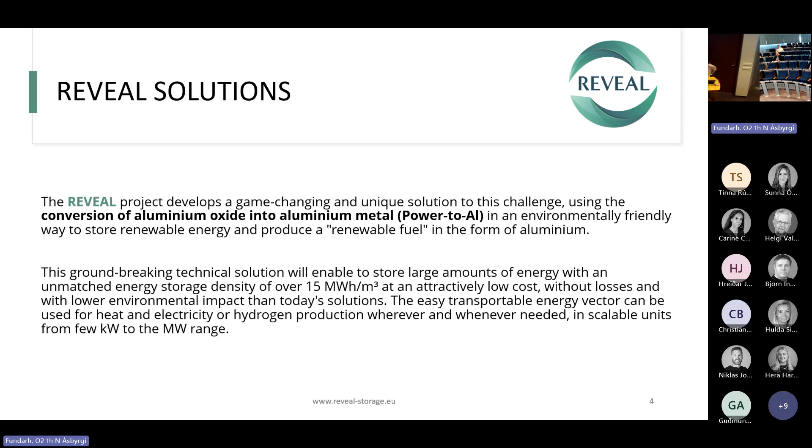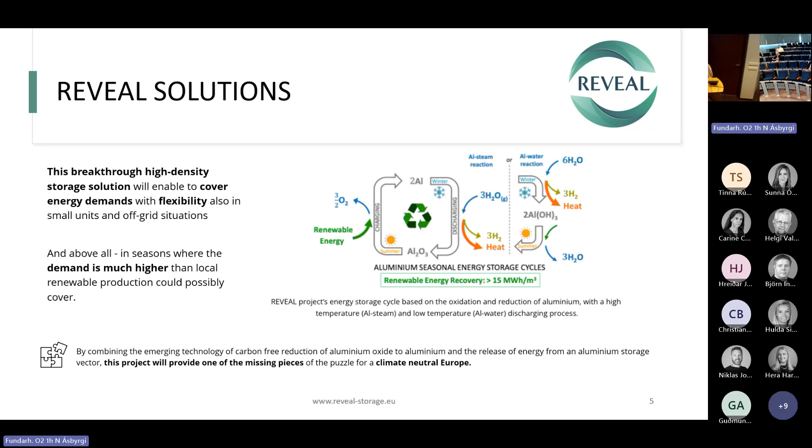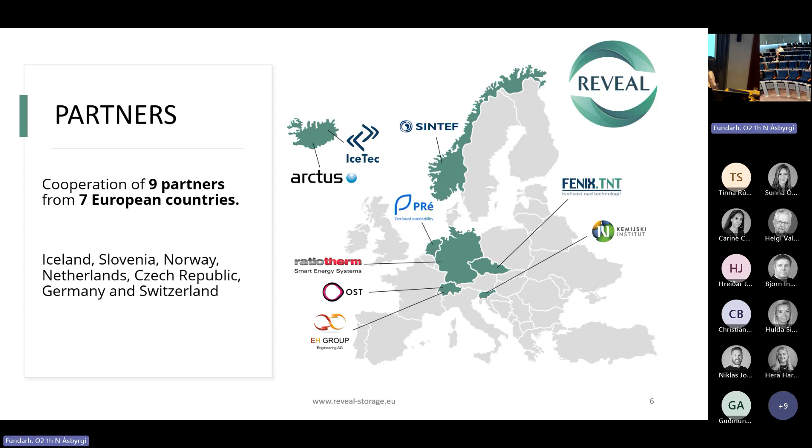So you take this aluminium and water and you produce hydrogen, and the byproduct is aluminum hydroxide, which after heating can be converted back to aluminum oxide, which we can feed back to the smelter. So this is a closed life cycle. And we study two processes, at both low temperature and high temperature. We have 9 partners from 7 European countries: Iceland, Slovenia, Norway, Netherlands, Czech Republic, Germany, and Switzerland. IceTec is the main coordinator of the project, and we also work on power to aluminium, which is green aluminium production.

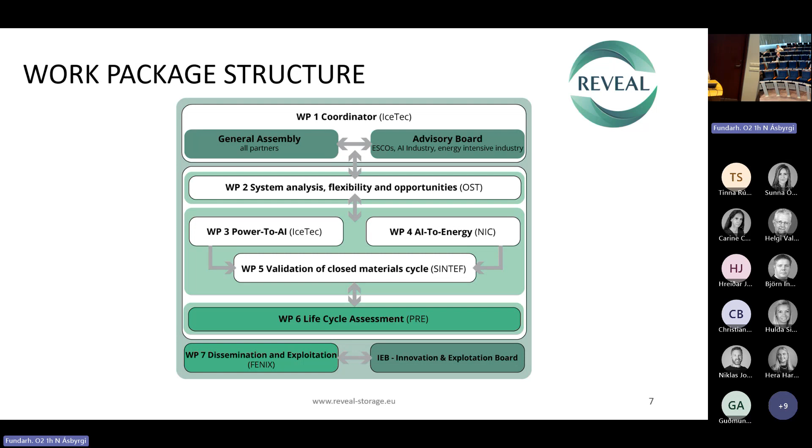Which is very great, actually. Like I said, we are very small in Iceland, but we are developing and competing with large giants. For instance, in CO2-free aluminium production, we are competing with Elysis, which is supported by Rio Tinto, Alcoa, and Apple. Another competitor is in Russia, Rusal, another giant. In Iceland, we have been developing this for more than 10 years, and just recently Fremont started supporting us, and we're doing a pilot scale there. So it's very remarkable, I think.

To jump in here, this aluminum that you're sending around, this is what you and Arctus have made, part of the reactor? Yes. So CO2-free aluminum. Yes, exactly. Very special.

Wasn't CO2-free production of aluminum being developed in Russia a few years ago? Yes, exactly. That's why I'm saying we're competing with them. So actually, I think this technology will help us transport renewable energy from Iceland to other countries where renewable energy may not be an option, for instance in Asia or other remote countries.